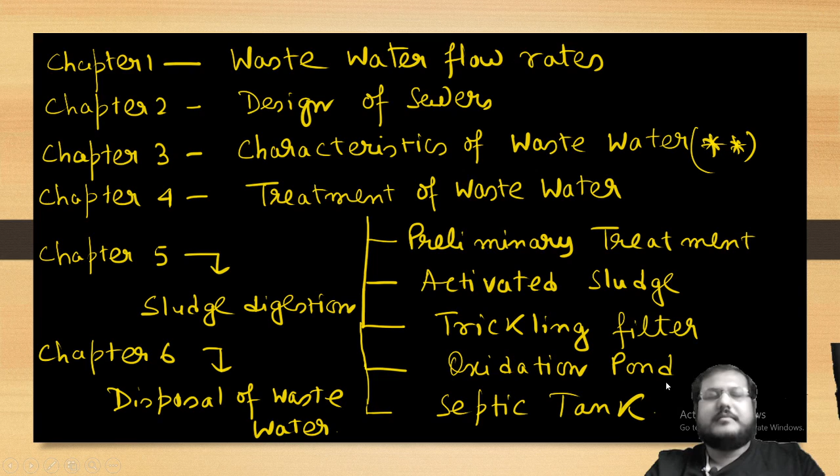So first we are going for the first segment. Today we are going to discuss the first two segments: one is wastewater flow rates and another is the design of sewers. So we are going to see two things: how much wastewater will be generated in a community, and how to convey it, what are the hydraulic parameters to convey the wastewater from one place to another.

Now, first of all, to know the wastewater flow rate chapter, first we need to know certain definitions to understand the thing.

First definition is sewage. What is the definition? The total wastewater generated from a community is called sewage. So what is the total wastewater? It's nothing but domestic wastewater, industrial wastewater, and surface runoff, which is the excess rainfall. So whatever is flowing to the sewer line is called sewage. Sewage is the summation of domestic wastewater, industrial wastewater, and surface runoff.

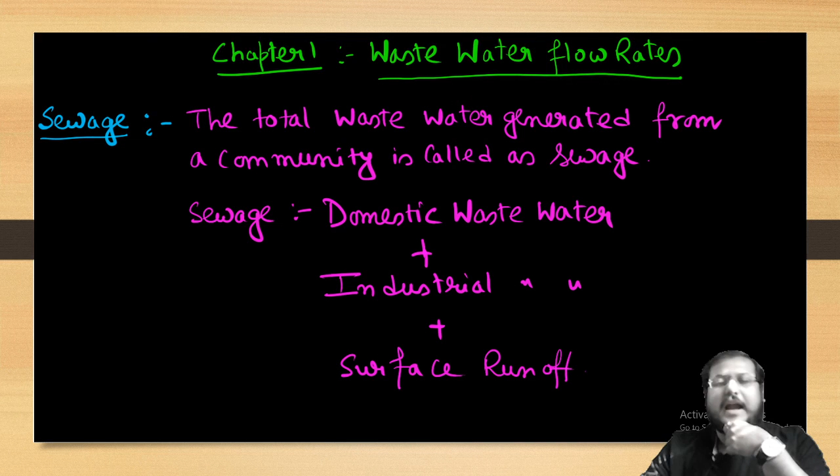Then coming to the term sullage: sullage is the less offensive part of sewage. So among the three components—domestic wastewater, industrial wastewater, and surface runoff—the less offensive or less problem-creating part is domestic wastewater, wastewater coming from your kitchens and bathrooms, and the surface runoff, which is nothing but the rainwater itself. So sullage is the less offensive part, which is domestic wastewater and surface runoff.

Now here is a point you need to remember properly: we are not at all concerned about the industrial wastewater. Why? Because different industrial wastewater will have different kinds of properties. It's a master level approach to find out and treat industrial wastewater. We are concerned about two types of wastewater: domestic wastewater and surface runoff, because they are the most basic types of wastewater carrying to the sewage. Industrial wastewater is a master level, specialization process.

For example, if we are talking about industrial wastewater from a tannery industry, which processes the skins of animals, we will get a lot of chromium. Or if we are talking about wastewater coming from a textile industry, we will get a very colory wastewater, where color or dye will be more. So different industries will produce different types of wastewater, and handling them will be different.

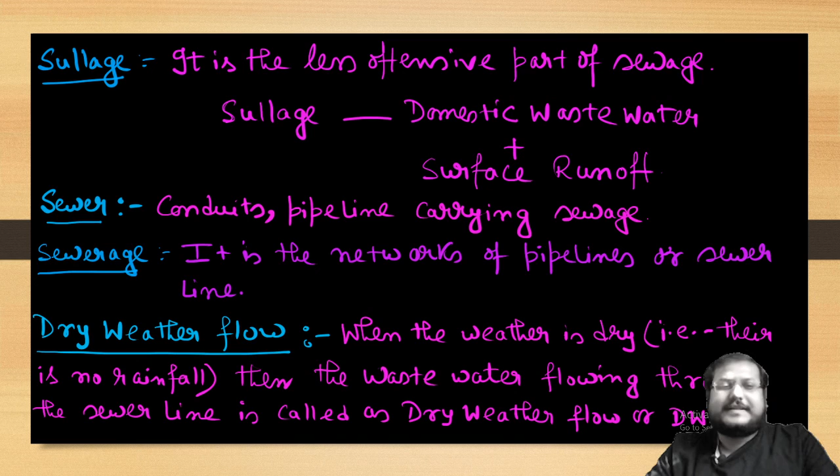Then sewer. What is sewer? The conduits and pipeline carrying sewage is called as sewers. What is sewerage? It is the networks of pipelines or sewer lines.

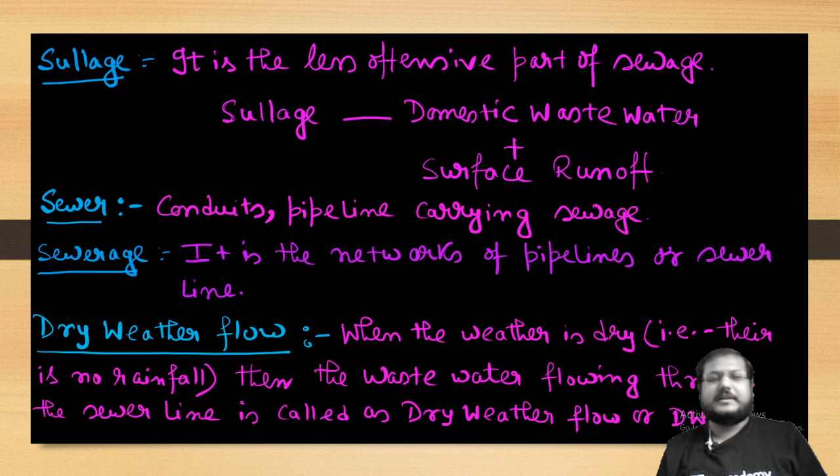Now going to the dry weather flow. When the weather is dry, that means there is no rainfall, then whatever flowing through the sewer line is called as dry weather flow. As per definition, it's ideal, so ideally, dry weather flow should equal, in dry weather, industrial wastewater also flows and domestic wastewater will also flow. But for our case, DWF means we will only consider the domestic wastewater. So eventually, for our case, DWF will be the domestic wastewater only.

Wet weather flow is during the rainfall, whatever is flowing through the sewer line. So wet weather flow, it is actually the total sewage.

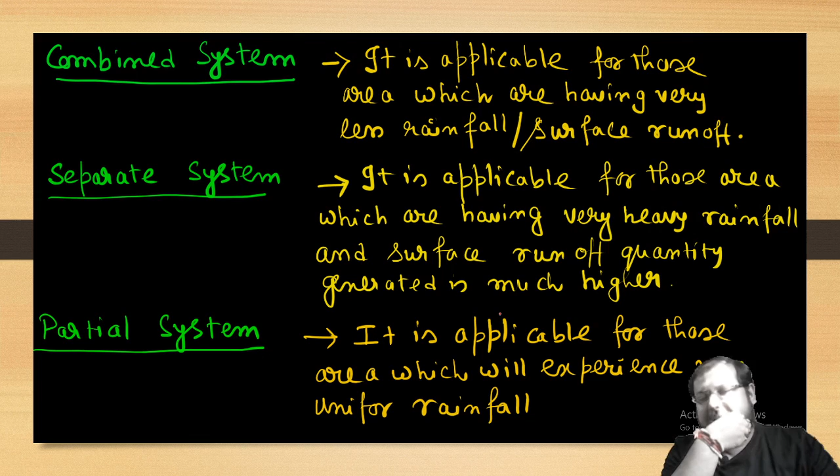First, we are coming to the combined system. Suppose the surface runoff is very negligible or very small compared to the wastewater. Suppose the wastewater quantity is 2 meter cube per second, surface runoff is 0.5 meter cube per second. Will you put a separate system for surface runoff? Answer will be no, because surface runoff, though it doesn't require any kind of treatment, it is the purest form of water present, so only small treatment process is required. So if you are constructing anything for 2 meter cube per second, adding 0.5 will not hamper that much.

So it is applicable for those areas which are having very less rainfall or surface runoff. Where rainfall is less and surface runoff is less, combined system means one single pipeline will carry both DWF and SWF.

Now separate system, exactly the opposite to the combined system. It is applicable for those areas which are having very high rainfall and surface runoff quantity is much higher. We are applying this particular system where the surface runoff quantity generated is much higher than the wastewater. Suppose you are doing this same exercise for Cherrapunji. Now in Cherrapunji, suppose 2 meter cube per second is the wastewater and 10 meter cube per second is the surface runoff. If you put these waters together, you have to design for 12 meter cube per second, whereas your work should be done by 2 meter cube per second.

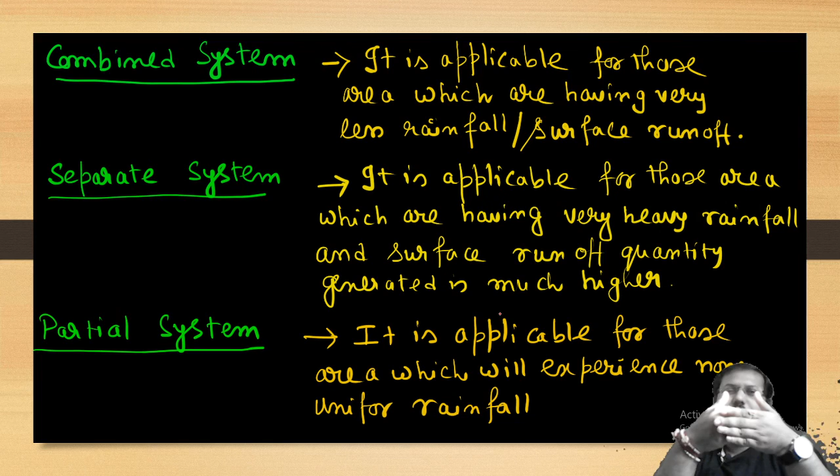In these cases, eventually what amount you need to treat is actually 2 meter cube per second, but what amount you are getting is 12 meter cube per second. So eventually your treatment unit volume will be much higher than it is required, which is not economically viable. So it is applicable for those areas which are having very high rainfall and surface runoff quantity generated is much higher.

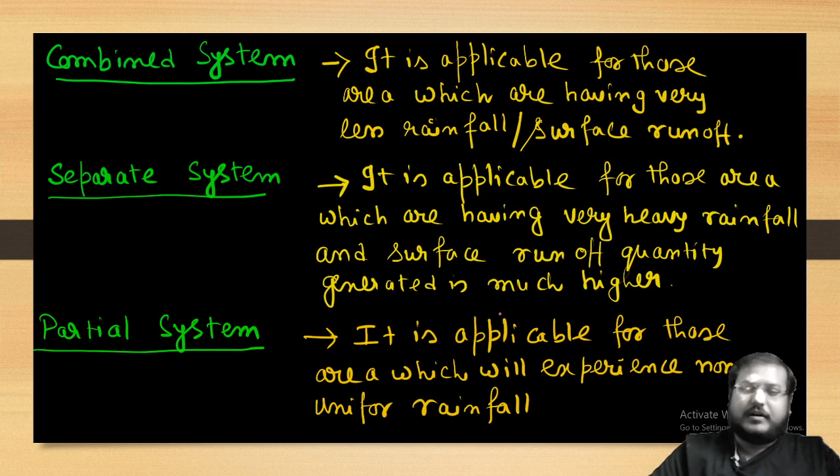Now partial system, which is applicable for the area which is having non-uniform rainfall. Partial system is for areas which have non-uniform rainfall. What is non-uniform rainfall and uniform rainfall?

Have you heard about Virender Sehwag and Chris Gayle in cricket? Obviously you may have heard about them. So just a minute.

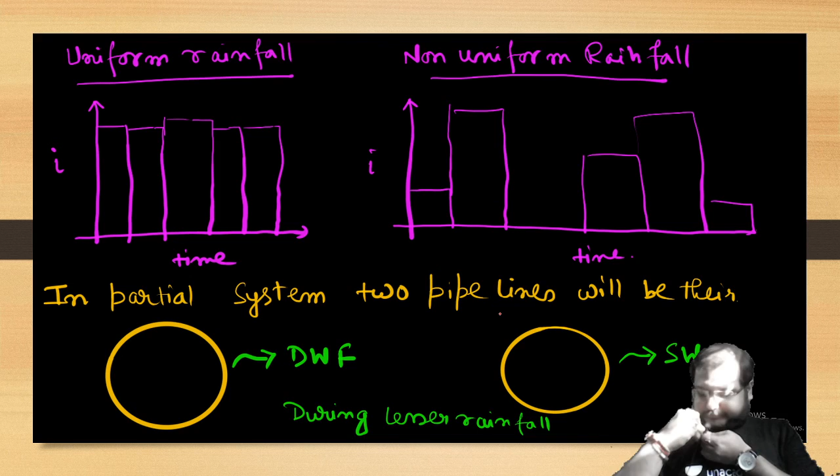So we are discussing uniform and non-uniform rainfall. We have heard names like Chris Gayle, Virender Sehwag - these batsmen generally, from the very first ball to the last, their motto is to hit sixes. The span of their innings will be smaller but very entertaining. If you plot a rainfall hyetograph for uniform rainfall, the peak intensity will always be higher, but for a smaller duration.

Non-uniform rainfall is like Rahul Dravid or Jacques Kallis. They will take some time with the same delivery - sometimes they go for a big boundary, sometimes play a defensive shot, for the same type of delivery. Sometimes the peak will be very high, sometimes the peak will be less, and sometimes no runoff will be there, like this.

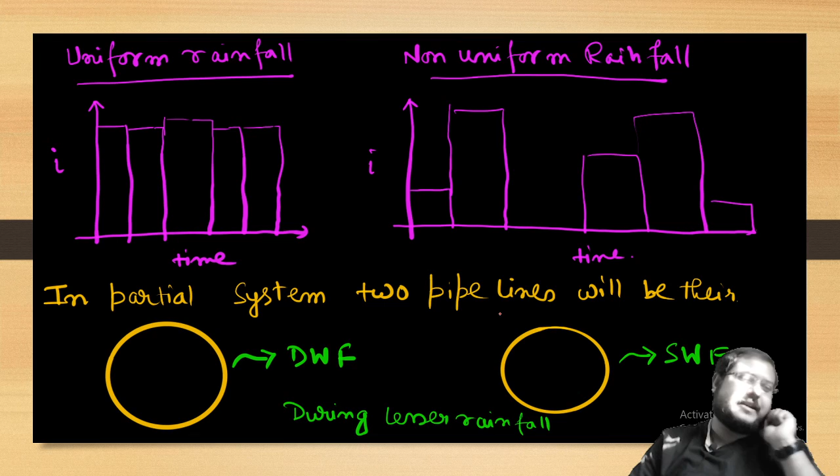So quantifying or qualifying a batsman like Sehwag or Chris Gayle is very easy - if you put the ball in their hitting zone, it is going for a six. But quantifying a Jacques Kallis or Rahul Dravid type of player is very tough.

So actually, in non-uniform rainfall, sometimes rainfall will be higher, sometimes lesser. So there will be two pipelines - one bigger diameter pipeline and another smaller diameter pipeline. During lesser rainfall, the bigger diameter pipeline will carry only the DWF, which is domestic DWF, but the smaller diameter pipeline will carry only the SWF during lesser amount of rainfall.

Whereas during heavy rainfall, the smaller diameter pipeline will not be able to carry all the SWF, so the extra SWF will be carried through the bigger diameter pipeline. So during lesser rainfall, it acts as a separate system, but during heavy rainfall, it acts as a combined system. That's why it is called the partial system.

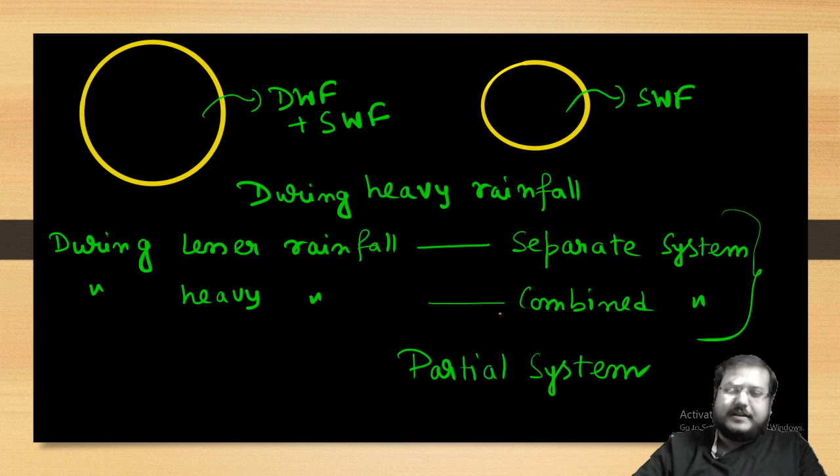So that is clear - these are the different types of systems present in the sewerage system. One is the combined system, where DWF and SWF are carried together, applicable for areas with lesser rainfall. The separate system is done for heavy rainfall areas, and the partial system is for non-uniform rainfall areas, where DWF and SWF are sometimes combined, sometimes separated.

Now we are going for the estimation of DWF. DWF is ideally the domestic wastewater along with industrial wastewater, but for our case we are concerned only about domestic wastewater, since industrial wastewater is zero for us. So DWF is population multiplied by per capita sewage flow - similar to how in domestic water supply, Q average (QDWF) is population multiplied by per capita water supply.

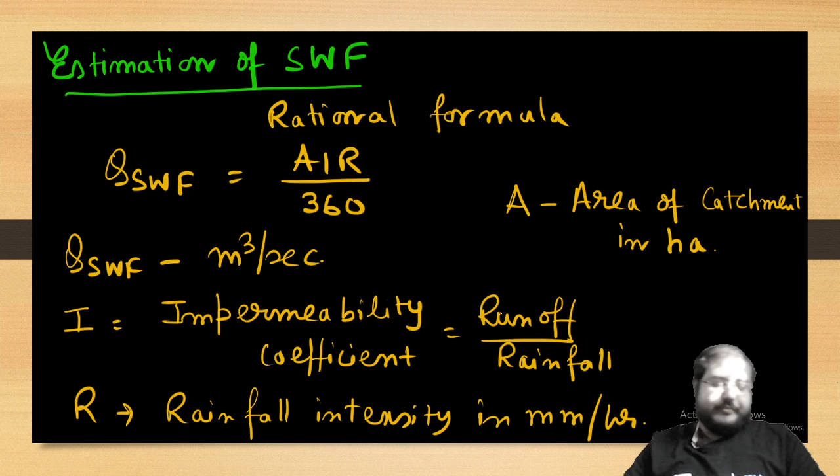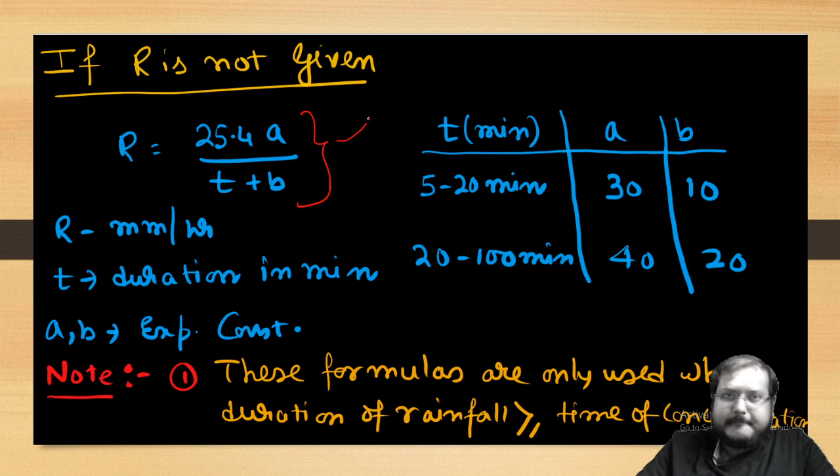If R is not given, then R will be estimated by an empirical formula: R equals 25.4A by T plus B, where R is in mm per hour, T is duration in minutes, and A and B are experimental constants.

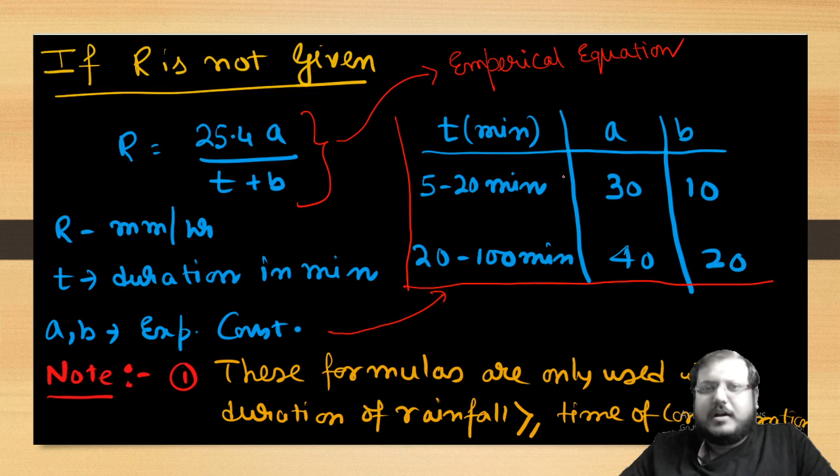To find A and B, we need to remember this particular table. For duration 5 to 20 minutes, A will be 30, B will be 10; for 20 to 100 minutes, A will be 40, B will be 20. We don't have to bother about durations beyond 100 minutes or less than 5 minutes, since the equation changes for those ranges.

Now, there is a note: these formulas are only used when the duration of rainfall is more than or equal to the time of concentration. And if the duration of rainfall is not provided, then the time of concentration will be considered as the duration of rainfall. So actually, what is time of concentration?

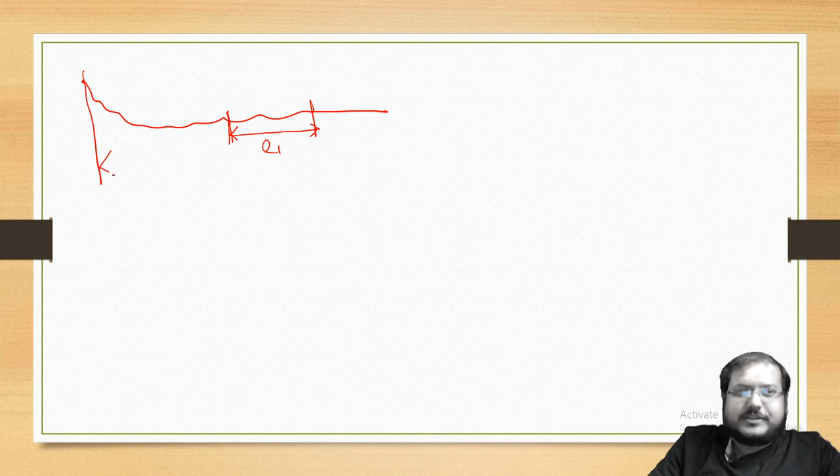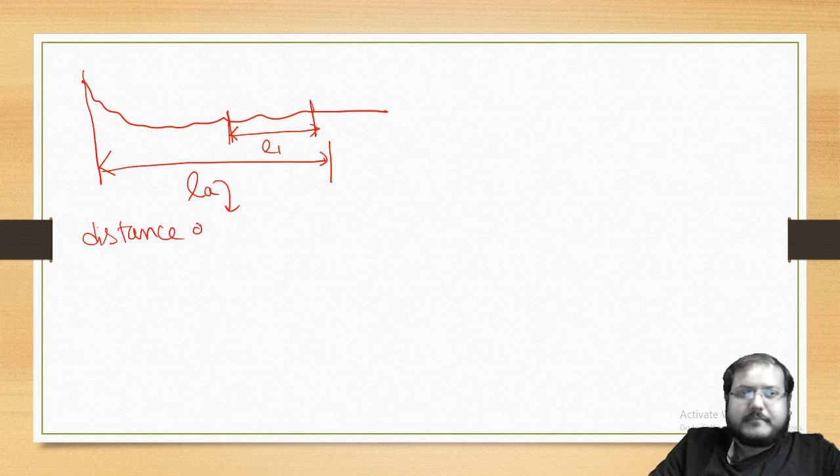Suppose this is your catchment area and this is the outlet. From different points of the catchment area, the distance will be different. There will be a point from where the distance to the outlet is maximum, and that is called the axial length — the distance of the farthest point of a catchment to the outlet.

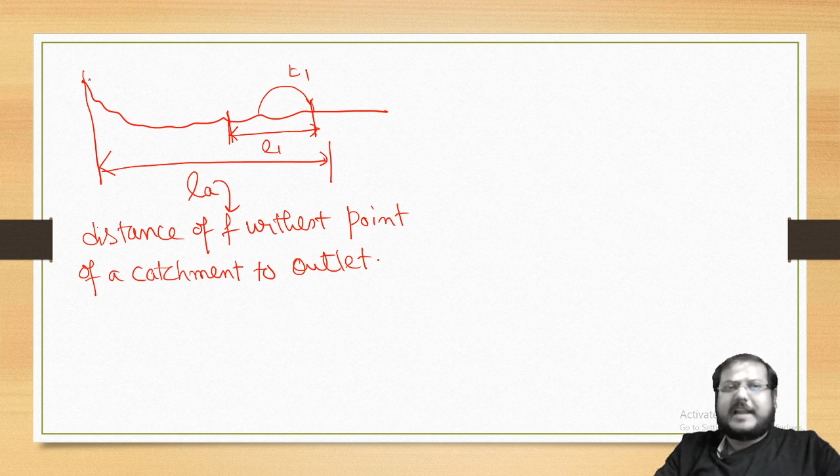Now, if certain runoff is traveling from this point to the outlet, it will take time t1. Maximum time will be taken when the runoff is covering this axial length. So, time taken by runoff to cover the axial length distance is...

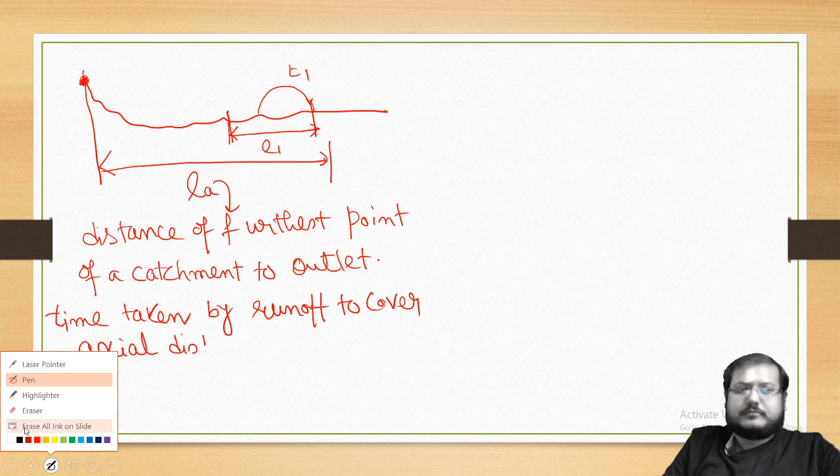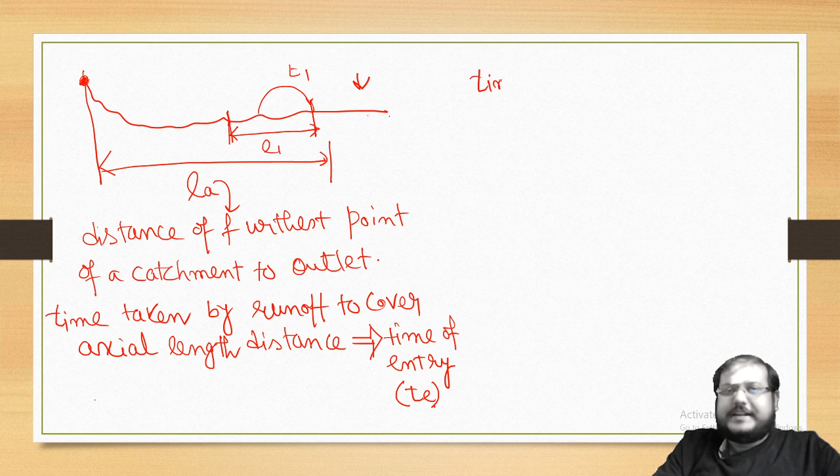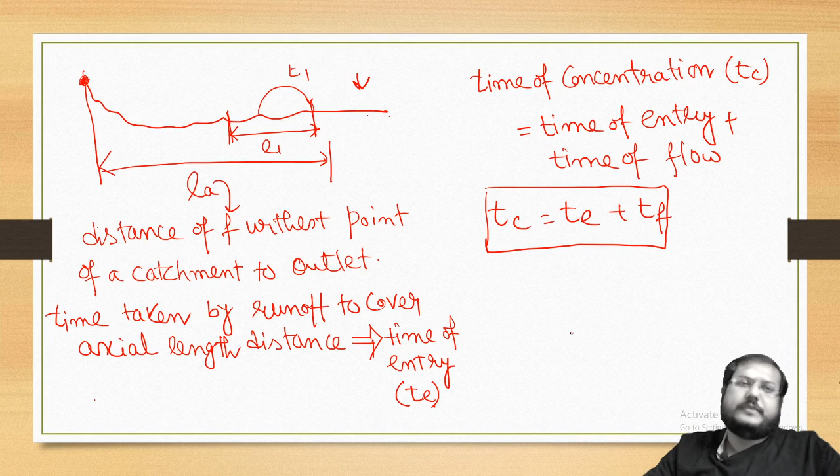And if the duration of rainfall has to be greater than or equal to the time of concentration, that means the minimum duration should be equal to the time of concentration. This is the reasoning used in hydrology: rainfall duration equals the time of concentration, in order to apply these formulas.

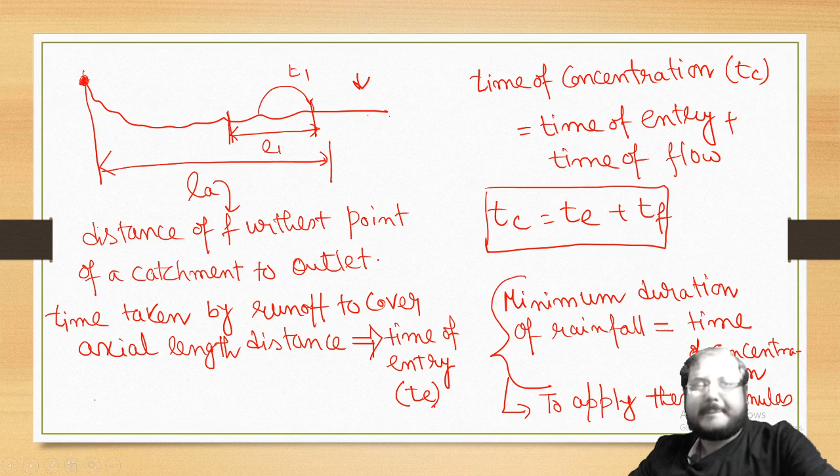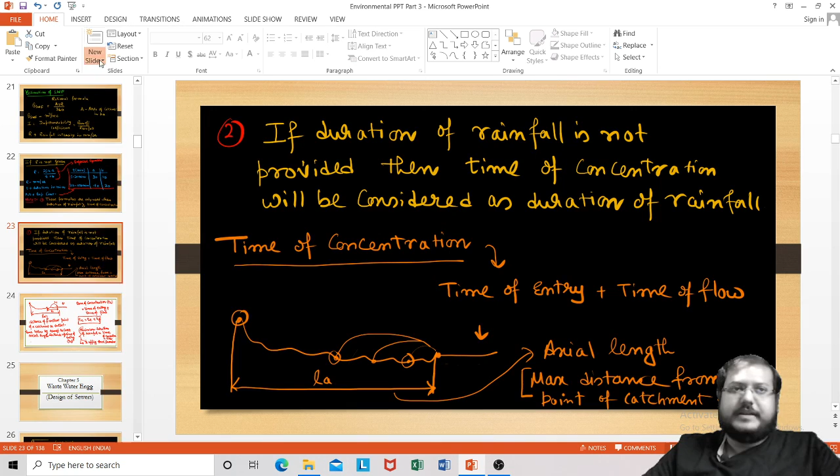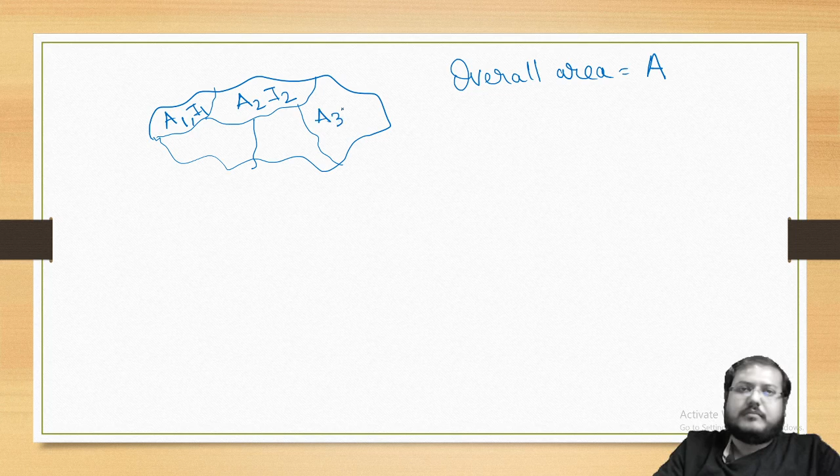And one more thing I should mention: suppose this is the overall catchment area A. Different segments of the catchment, within the overall area A, have different impermeability coefficient values.

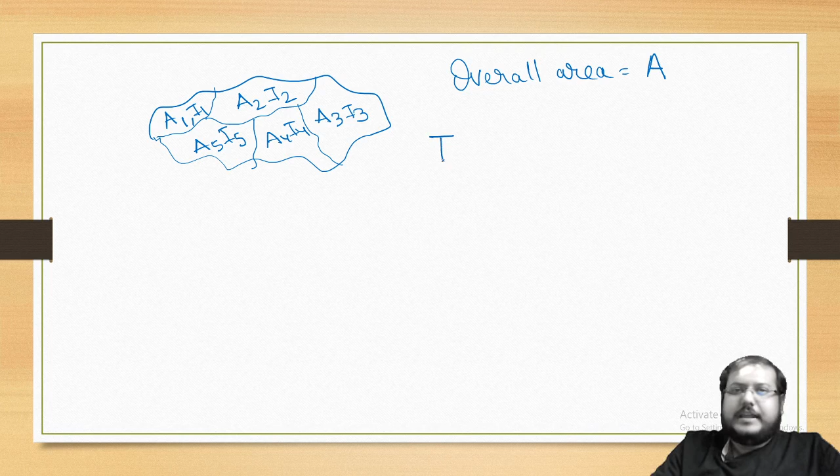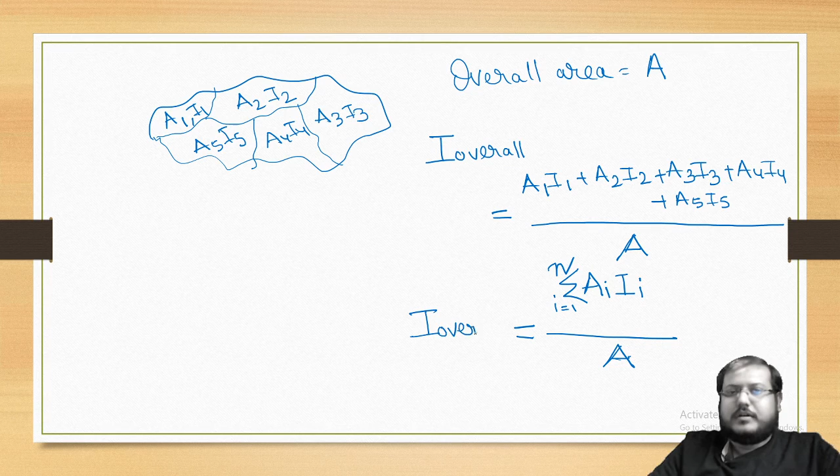Then the overall I will be equal to A1*I1 plus A2*I2 plus A3*I3 plus A4*I4 plus A5*I5, whole divided by A. That is equal to the summation of Ai*Ii, where i equals 1 to n, divided by A — that gives the overall I. You need to remember that.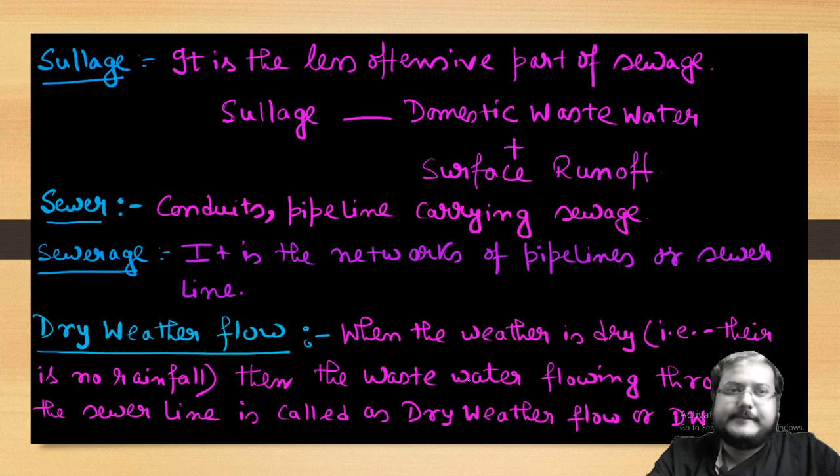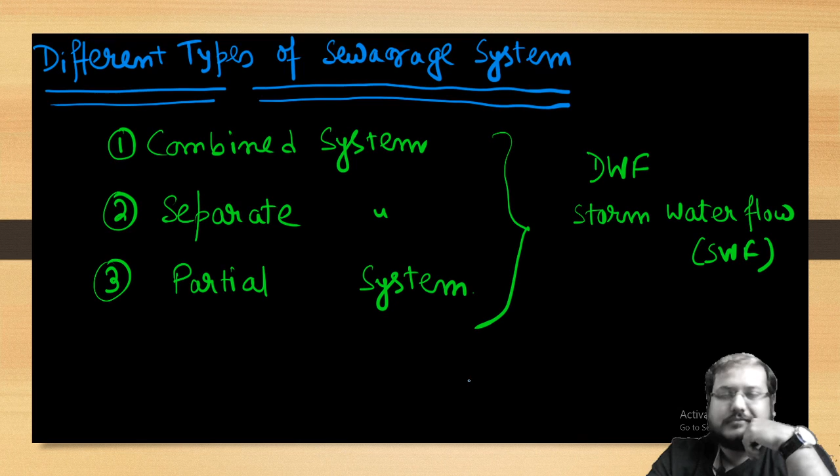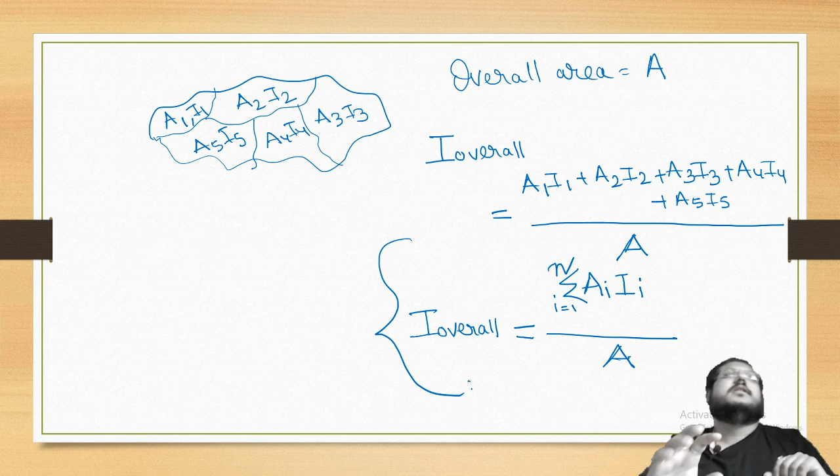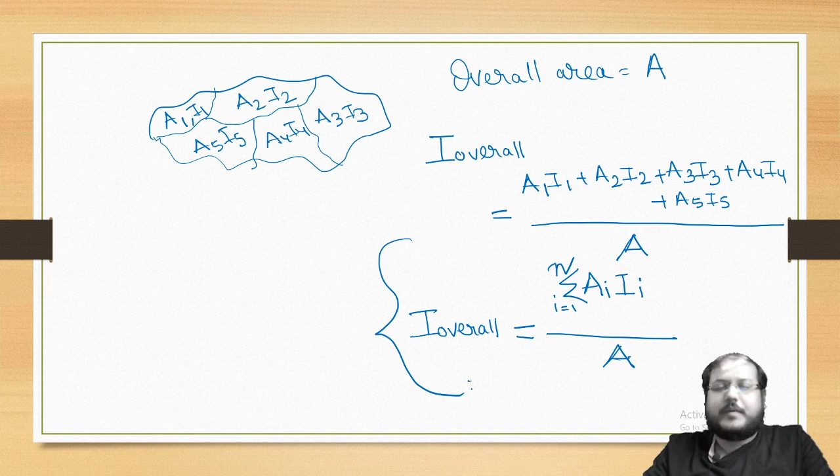Okay, let's have a brief recap. First, the definitions — we went through the objective, then abstract classifications, then definitions, then different types of sewerage systems, estimation of DWF, estimation of SWF, and notes with their explanations. That's the wastewater flow rate chapter, where we observe how much wastewater is generated from a particular community.

Now we are moving to the next segment of wastewater engineering: design of sewers.

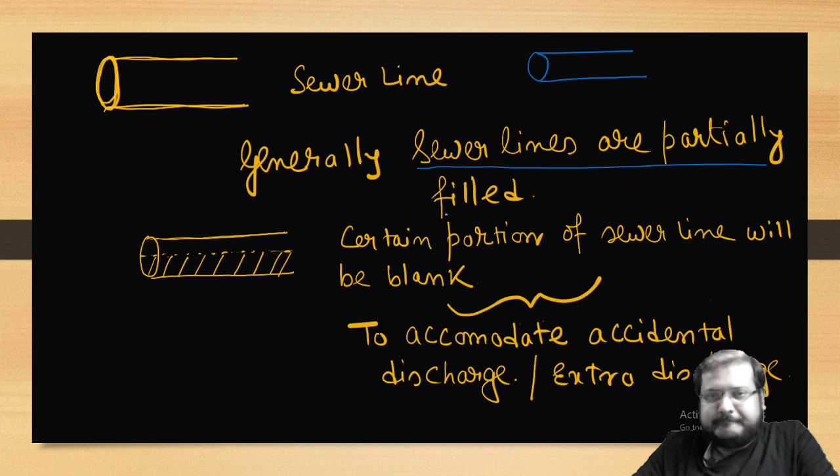So when we are concerned about a sewer line, generally it is a pipeline. Then you may ask why we study sewer lines separately, since all the pipe flow parameters and concepts apply. The point is that generally sewer lines are partially filled — a certain portion of the sewer line remains blank, to accommodate accidental discharge or extra discharge.

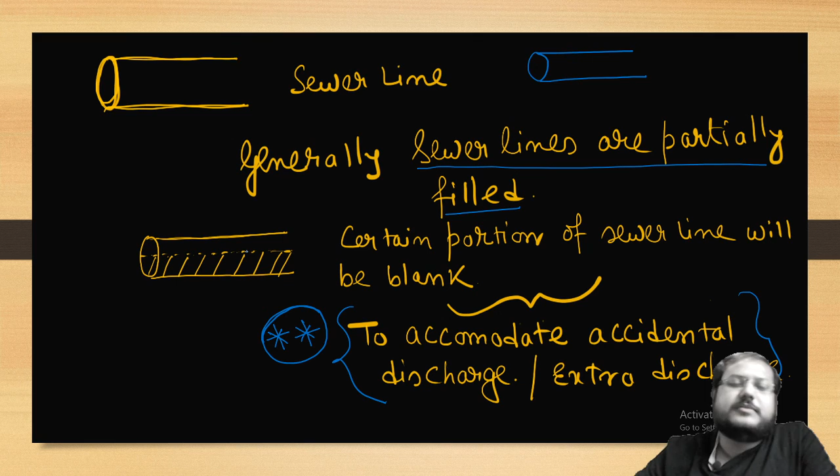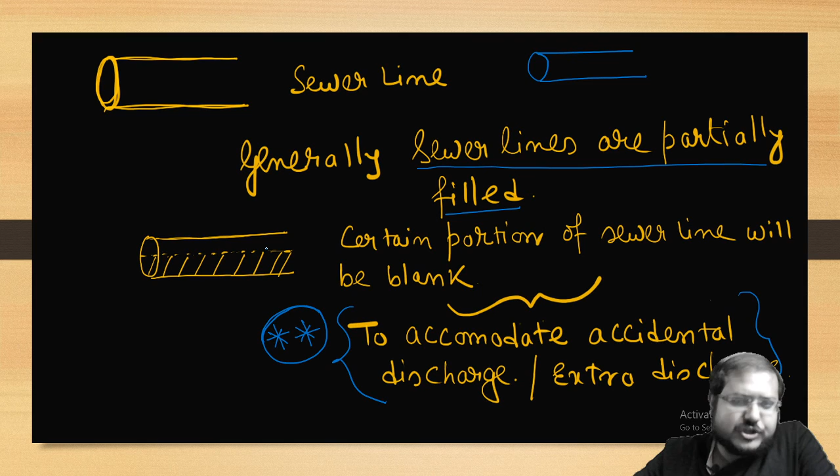This accidental or extra discharge is the key reason. So when you keep part of the sewer line blank, it means the flow is not enclosed on both sides by a solid boundary — the topmost part of the flow has certain gaseous exposure, with gases like carbon dioxide and H2S produced due to decomposition of matter present in the sewer line.

Now let's compare this with open channel flow. In open channel flow, the topmost part of the flow is exposed to air or the atmosphere.

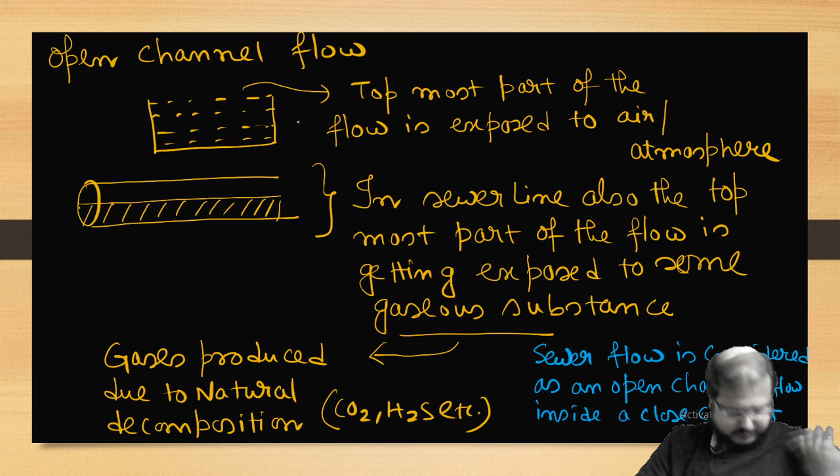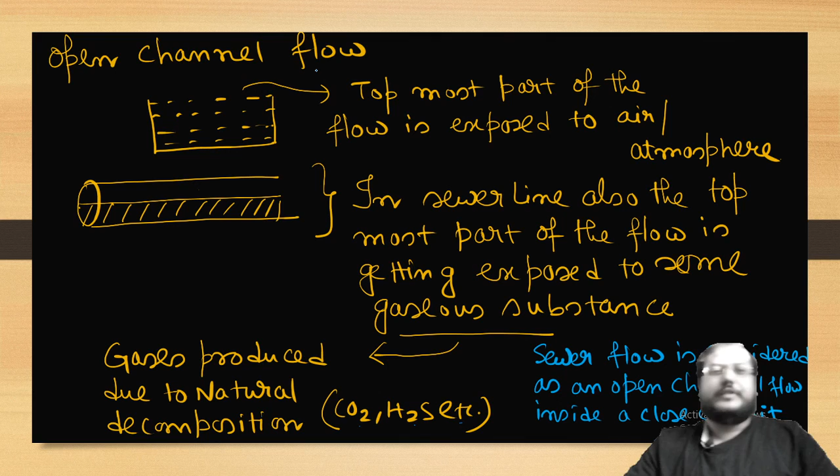In sewer line, the topmost part of the flow is getting exposed to gaseous substances produced due to natural decomposition, like carbon dioxide, H2S, etc. So the sewer flow has a topmost part exposed to air, similar to open channel flow where the topmost part is exposed to atmosphere. That's why sewer flow is considered as open channel flow inside a closed conduit - it's covered, but has the property of open channel flow.

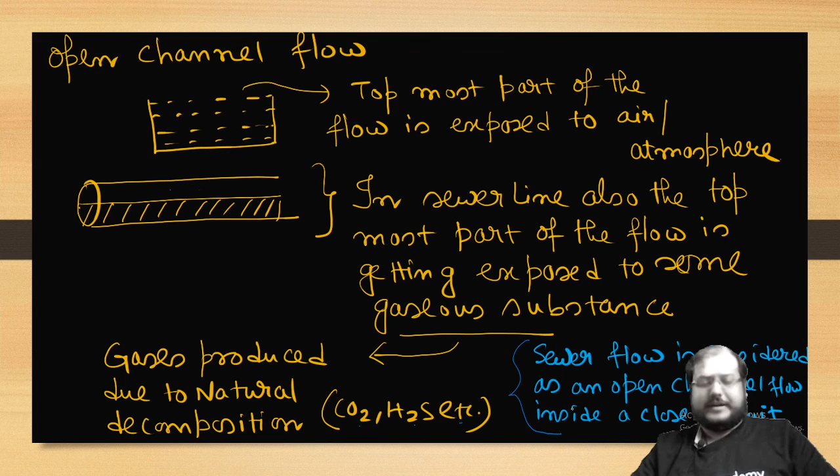Now, as the sewer flow is open channel flow inside a closed conduit, we will go for the hydraulic designs of sewer using equations like Chezy's equation, which is useful for open channel flow. The first equation will be Chezy's equation.

V will be C under root RS, where C is Chezy's constant and R is the hydraulic radius. Don't confuse yourself with radius and hydraulic radius. Hydraulic radius is area by wetted perimeter. So suppose this is a rectangular cross section A, B, A.

So your normal perimeter will be 2 into A plus B, and wetted perimeter will be the summation of this segment and this segment only, so it will be 2A plus B. So there's quite a difference between perimeter and wetted perimeter - this is wetted perimeter, used for hydraulic radius.

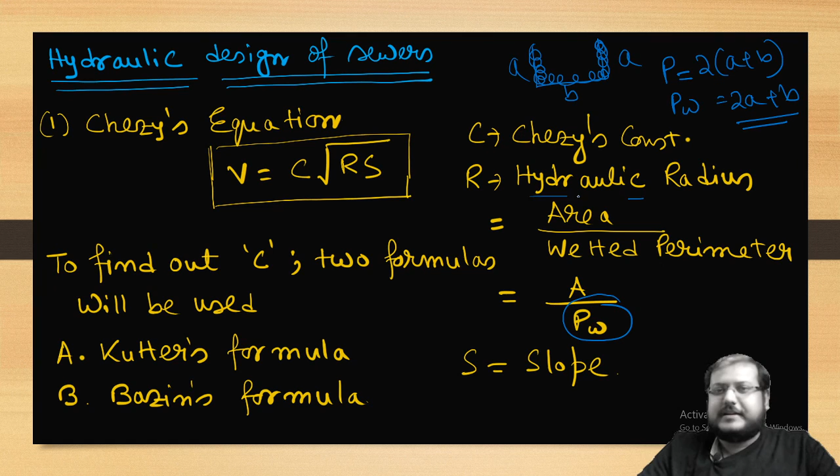To find out C, two formulas will be used - one is Kutter's formula and second is Bazin's formula. The Kutter's formula is: C equals 23 plus 0.00155 by S plus 1 by N, whole divided by 1 plus 0.0015 by S plus 23 within bracket into N under root R.

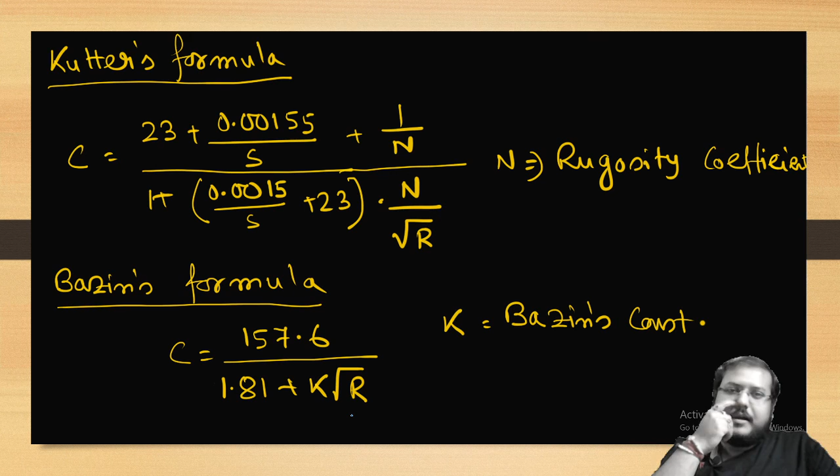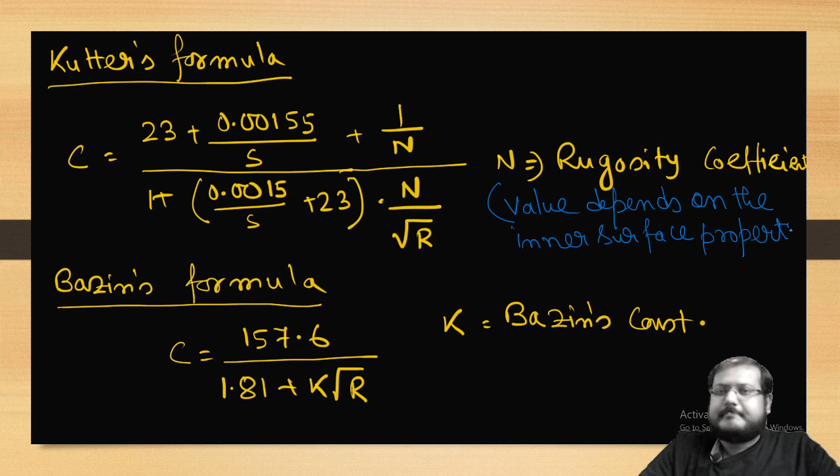R we know, N is rugosity coefficient, and the value depends on the inner surface property of the sewer line.

And Bazin's formula, where C will be equal to 157.6 by 1.81 plus K under root R, where K is Bazin's constant. The main difference between the approach of Bazin's formula and Kutter's formula is the use of slope.

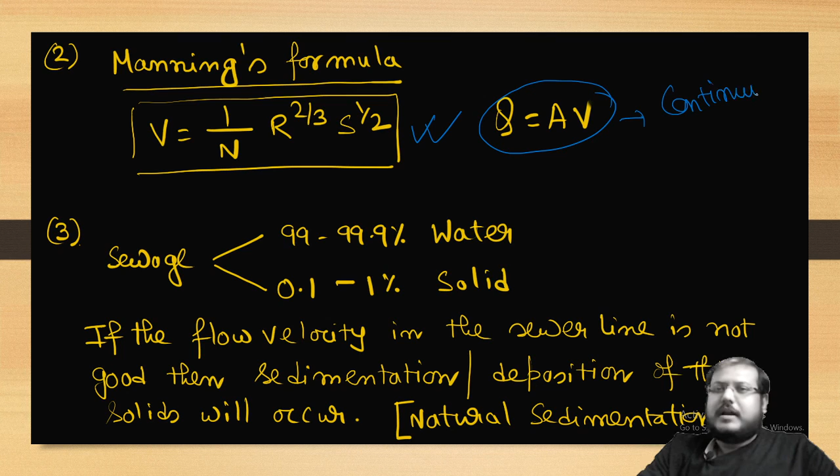Next formula is Manning's formula, which will be V is equal to 1 by n, r to the power 2 by 3, and S to the power half. You have used this formula many times - very basic. And Q equals A into V, this is the continuity equation you also know and have used many times. Again, you need to use it.

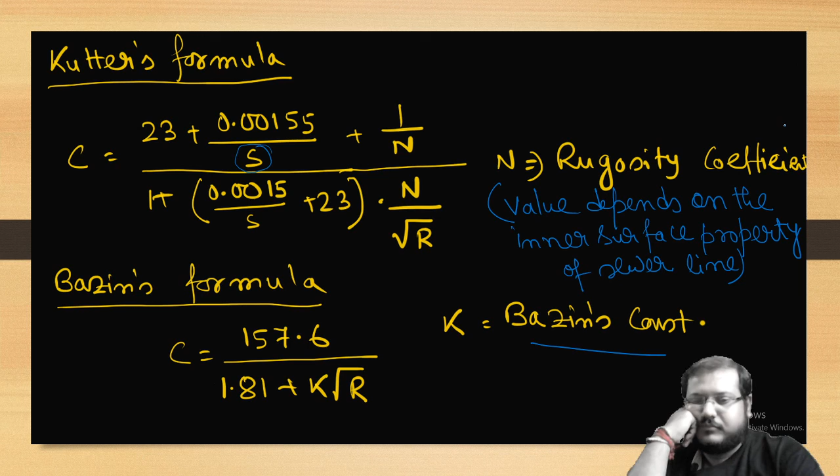Now see, in sewage, if you look at the components, 99 to 99.9% will be water, and 0.1 to 1% is solid. And these solids, as they have higher specific gravity than water, will try to get deposited in the inner layer of the sewer line. If the flow velocity in the sewer line is not good, then sedimentation or deposition of these solids will occur.

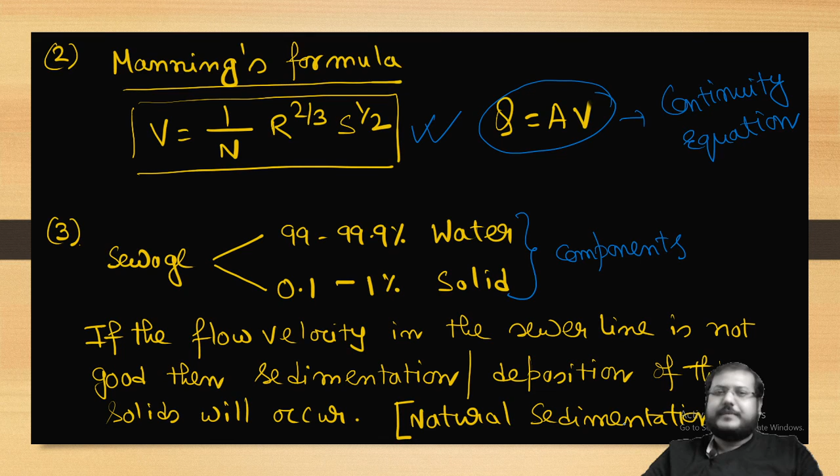This is natural sedimentation. Now, if the velocity is very high, then scouring of particles will occur, roughening the inner surface. In both cases, depth of flow will get changed, because if solids are getting deposited, the depth of flow will get reduced. And as we know, discharge is the function of depth of flow.

So here it is silting - it is actually an irrigation term. The same thing is happening in irrigation, but here that's why we are writing a settling. We require non-settling, non-scouring velocity.

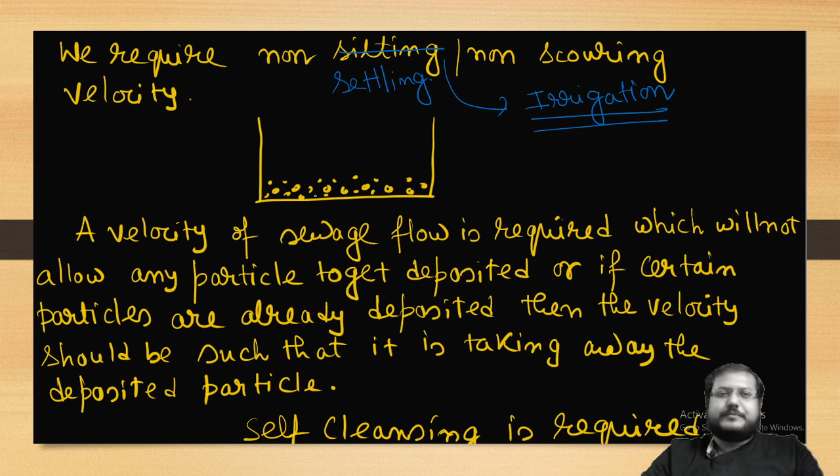So a velocity, suppose the particles are already deposited in the bottom of the sewer line, a velocity of sewage flow is required which will not allow any particle to get deposited. Or if certain particles are already deposited, then the velocity should be such that it takes away the deposited particle.

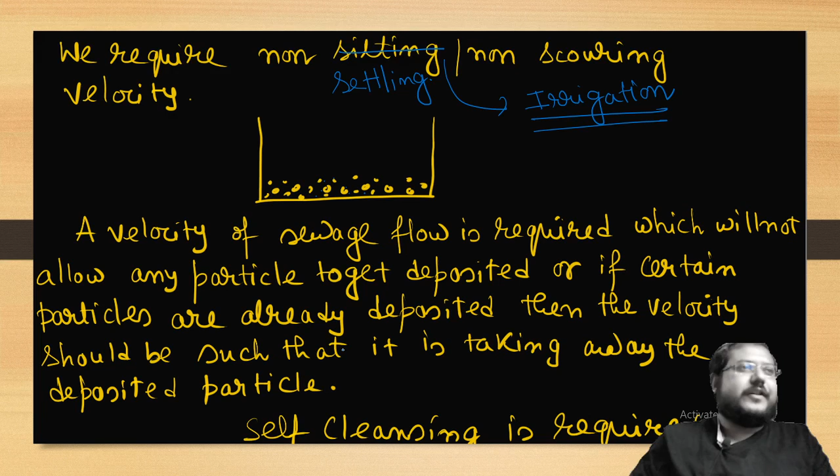It will not allow further deposition. Also, it will not allow, or it will take away the particles which are already deposited.

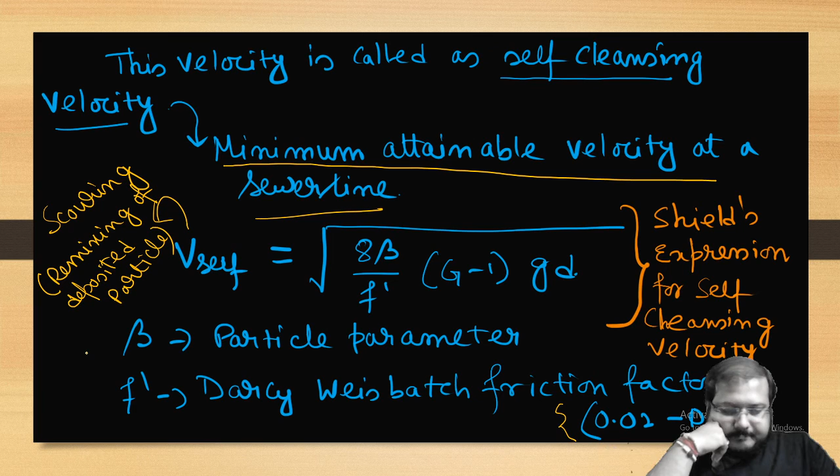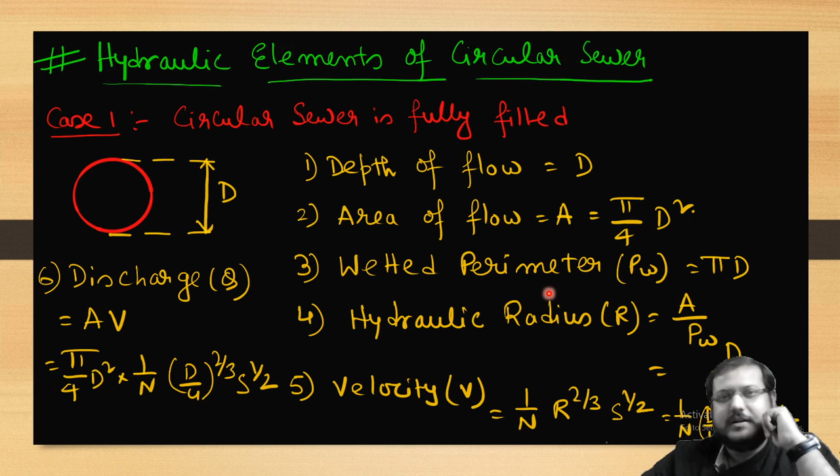Discharge Q will follow the continuity equation A into V, that is A is pi by 4 D square and V is 1 by N, D by 4 to the power 2 by 3, S to the power half. That is fair enough. Now coming to the circular sewer partially filled.

When the circular sewer is partially filled, each and every parameter will be denoted by a small letter. Like depth of flow will be small d, area of flow will be small a, hydraulic radius will be small r, wetted perimeter will be small pw, and so on. We will have some relationships between the partially flow parameters and the fully flow parameters.

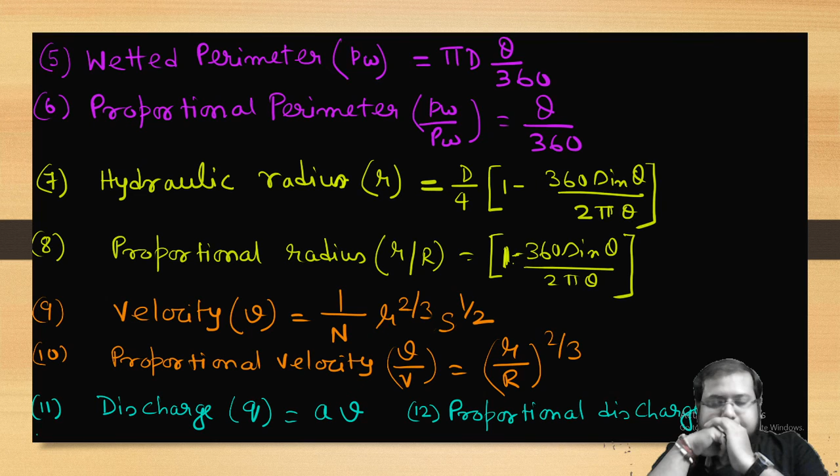Now we are going for a special case. If you understand this special case properly, then lot many problems will be solved without taking the calculator in your hand. It can be derived again, but you need to remember this, so that lot many steps can be jumped, because in GATE examination you have to be very smart when managing your time.

So the special case is when the sewer is half filled. Half filled means small d is capital D by 2, and theta is 180 degrees. What will be R half? So d by 4 into 1 minus 360 sin theta by 2 pi theta. Sin 180 is 0, so it's eventually d by 4 only, capital R.

So small r half is equal to capital R. Small v half ratio is small r by capital R to the power 2 by 3. As small r half and capital R are same, small v half will be equal to capital V.

Small a half is equal to pi d square by 4 into theta by 360 minus sin theta by 2 pi, where sin theta by 2 pi is 0, but 180 by 360 is half. So it will be again pi d square by 8, which is capital A by 2. So small a half is equal to capital A by 2.

Small q half is equal to small a half into small v half, which is equal to capital A by 2 into capital V. Capital A into capital V is nothing but capital Q. So it's capital Q by 2 - small q half is capital Q by 2.

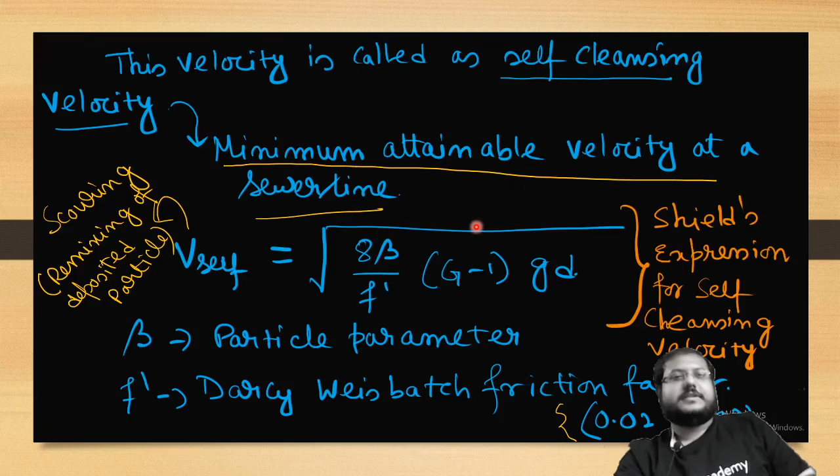So we have discussed these two things: design of sewers and wastewater flow rates.